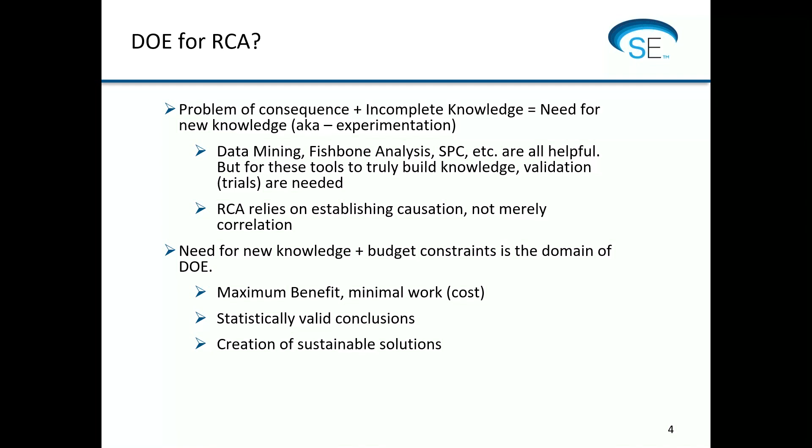Well, what's the cost of not understanding your product and its attributes and leading to quality issues, right? So a lot of times there's plenty of time to go fix it, but not always enough time to go do it right the first time, right? So anyway, I digress. So here's the situation. We have bubbles in the thermal interface.

So on the right-hand side, let's get a pen here. I'll just use a laser pointer. We have the computer chip referred to as the die. So that's the bottom layer. And what's happening is there is a lid being placed on top of the computer chip. And in between the two, there is a thermally conductive material called the TMI, the thermal management interface. And the goal of that is to help this whole assembly transmit heat through the lid, right? So we want a good thermally conductive material in the middle here.

So you can see we're talking about some form of computer chip. And what the customer was observing when they would, from the top now, take a look at an X-ray, if you will, of this whole assembly, is that on occasion they would have a bunch of bubbles in the thermal management interface layer. And they were able to kind of characterize it to say that when it's like on the left-hand side, that's a disaster for us, and that causes us to scrap the chips.

But on the right-hand side, which they measure as 2% voids or bubbles, that would be an acceptable tolerance. But when it looks like the one on the left, and you have bubbles throughout this thing, you're creating all kinds of problems. Specifically, this material contains a metallic flake that's used in a matrix, and the metallic flake is used to conduct the heat.

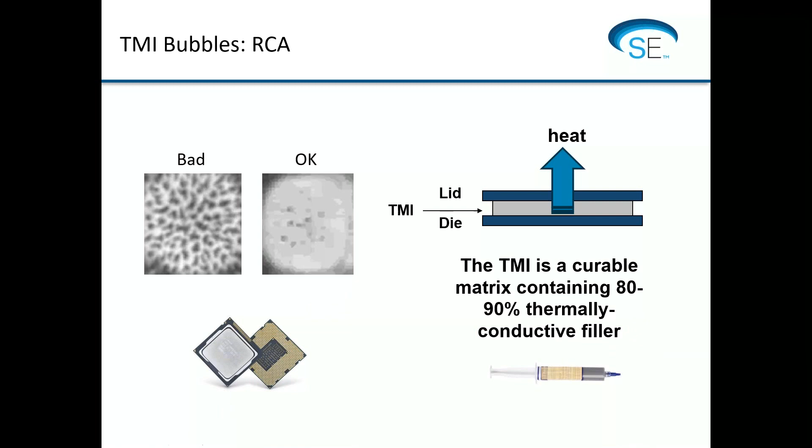So let's see. Okay, so the first point I want to make is it turns out that in spec material, as produced by my client, can perform good or bad at the customer. So here's the story, right? We saw this picture before on a previous slide, and if they pry the lid off and just take a picture of what the computer chip and the lid look like, you can see that it's just laced with these bubbles, these voids. Okay, so that's a true statement.

So the computer company tells us, look, here's a known good batch and a known bad batch, right? One that worked well for them and one that didn't. Can you evaluate and confirm whether or not they perform? Well, so we brainstormed with the team and came up with a way to approximate their application, and it was a very simple test. We took microscope slides and put the thermal management interface material between the microscope slides and cranked them down so it was the proper thickness.

And then we ran it through the heat cycle as prescribed by the computer manufacturer, exactly like they did it. Well, as it turns out, the known bad batch, we got a bunch of voids in it too. Looks just like their lid, right? So our microscope slide test was a pretty good indication of what was going on. And by the way, the known good batch was perfect. We didn't see a single bubble in it.

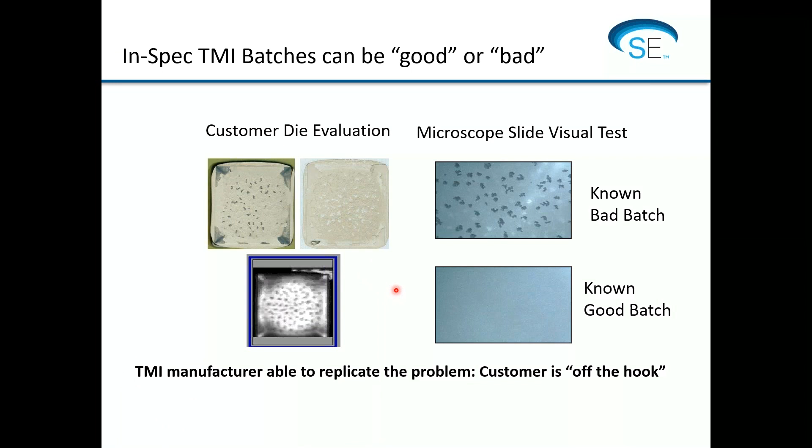So, like Steve talked about yesterday, we sat down with the team and did brainstorming. We involved the computer company with this as well. So we went all the way around the tables. This one's laid out a little different than Steve's yesterday, but we looked at the fundamental manufacturing steps. We looked at the raw materials: my client produced the matrix, the material that would cure under the heating cycle, and then there's an external metallic flake that goes into the product at 80 or 90%. And so we had that raw material.

The processing involves mixing and pre-packaging. The packaging itself, into the syringes, there's a de-airing process, and then they load the syringes. And then the customer uses the syringes in their application. The material is exposed in their environment for a period of time, and then it's heat cured once they put the lids on it, right? So they batch them up and then put them into an oven and go through this particular cycle.

So we looked at these steps and we imagined, well, what could go wrong in each of them? And the processing: loading, mixing, pre-packaging. Could we envision anything in there that might be a problem?

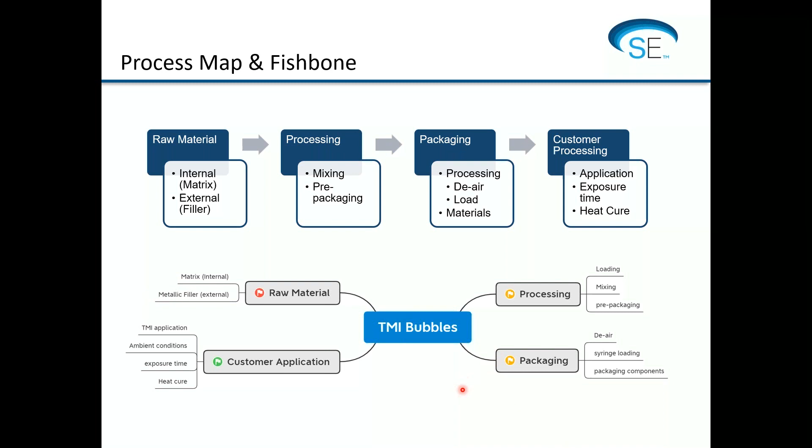Okay, that didn't build like I anticipated, but we'll get there. I'm going to put it all in here. I thought I got rid of the builds, but here we go.

So now we're starting to dig into the reports and understand the technology a little bit more, and we're trying to figure out what could cause these bubbles in the thermal management interface. Well, it turns out that if there's some moisture around, this is the theory now, the chemistry of the matrix material in the presence of a base catalyst would liberate hydrogen gas. That is a known phenomenon in the literature at my client's. Okay, so that could happen.

So then we take a look at several batches at the computer customer that succeeded or failed. And we measured the amount of water in the product. Well, it turns out that there is a very loose correlation between the water amount and the bubbles that were indicated by the computer company. So there's at least something of a correlation there. Not gonna claim causation yet, but there certainly is an indication that maybe this theory, pardon the pun, holds water.

Then we went out to the metal flake producer and had a conversation with them. Do you guys ever have any basic contaminants in your product? And they sort of laughed and said, we have base all around our shop. It's a common material, and we had no awareness it might be of concern to you. Oh, well, that's interesting. Do you think you could get rid of it if you needed to? Oh yeah, that would be easy.

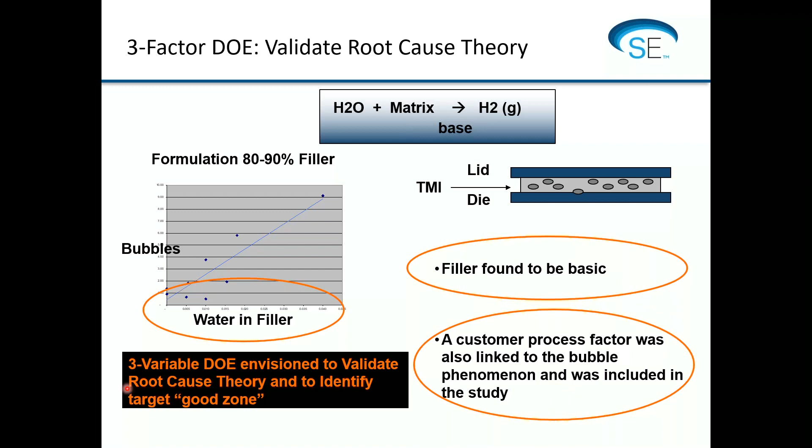So we went to the metal flake manufacturer and said, do you think you could set up to make these 4 corner materials for us? Do you think you could, within this range of water that we specified and the base catalyst level, execute your process to kind of target those 4?

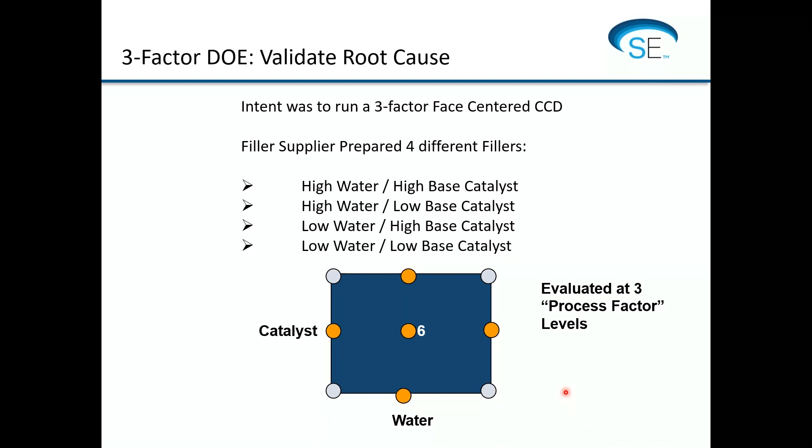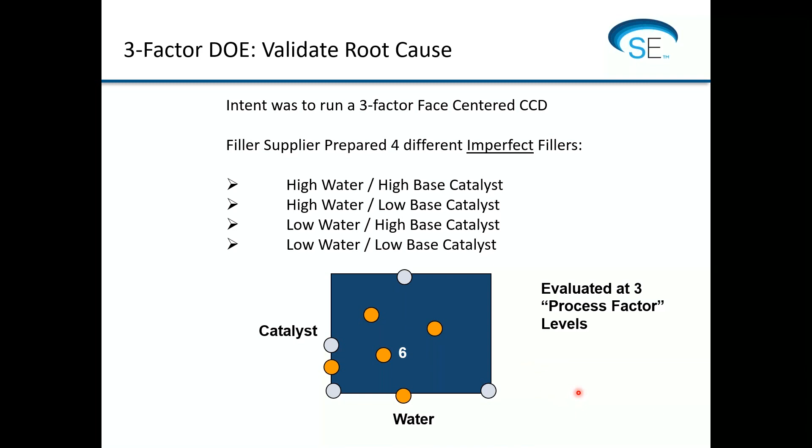So they made these 4, the silver ones now, they made those 4 materials. And then, just with the quantity provided, we were able to envision making the orange points. So, okay, now we got to figure out how to work that into a designed experiment.

So the first thing that we did, recall now that the computer company really didn't want to play too much. They didn't want to be terribly involved in this thing. They just wanted us to prove that we understood the phenomenon and could resolve it. So what we did is we went out and did a lab DOE as a preliminary effort to prove the concept. So we didn't involve the customer.

So we didn't include the process factor that the computer company wanted us to include because that was their process, not ours. So we really did a 2-factor central composite kind of, but we input the imperfect, right? The points that I just showed you weren't going to be an exact central composite design because the corners weren't where we want them. So we just used a central composite model and put the points in as we had them.

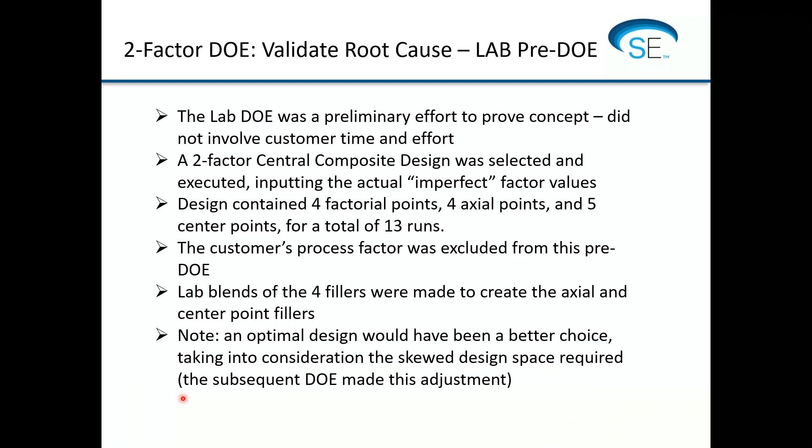We made the lab blends of the 4 fillers, created the axial and center points as best we could. It turns out that an optimal design would have been a better choice, taking into consideration the skewed design space. Nevertheless, we just kind of threw it in there and tried to see what the software would tell us. And there will be a second round of DOE that involves the customer, and we're going to be a little more careful designing that one.

So sometimes a picture is worth 1,000 words. We gather all kinds of statistics and make sense of the story. But this was already compelling that perhaps we were onto something, right? We look at the base catalyst, we look at the amount of water in the system, and it looks like you have a yes and, right? The more base, the worse, especially in the presence of water; if you have sufficient catalyst and the reactants are present, then you get the liberation of hydrogen gas as theorized. So that made short work of this.

And we are able to go out to the customer now and show them this chart that said, look, water and catalyst, your goal is to have less than 2%, right? And there's this big blue region where we're underneath that 2%, and there's a place where we can make really bad product, and we know that we can do it. The pictures, again, are worth 1,000 words.

Okay, so at this point, we've defined the problem, and we've measured performance, right? We understand that the problem is bubbles, and we set a specification of 2% voids as acceptable according to the computer customer. We've measured the performance. We know where we stand right now, and we're in the middle of the analyze phase in the DMAIC process for Six Sigma.

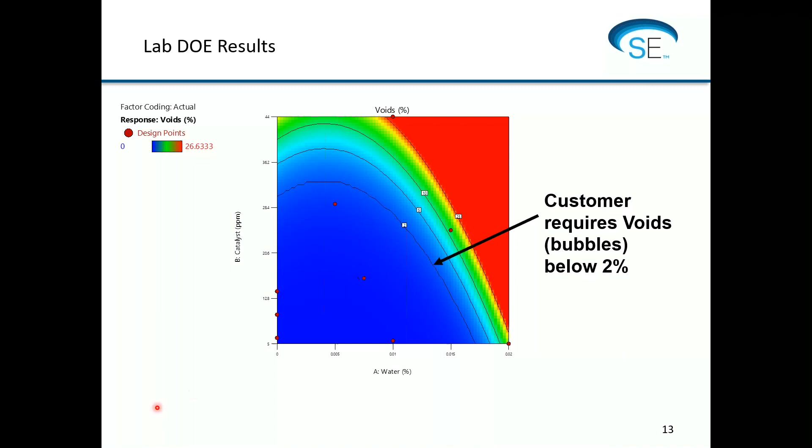The problem with that design that we created in the lab, of course, is that with the skewed distribution of points, the standard error plots really fade off when you get outside the region where we were collecting data, right? We don't want to extrapolate. So the standard error of the design looks really weak up in the corners, where you can see the red points are where we had data. When you get too far away from the bulk of your data, the ability to make predictions fades quickly. So that's something we're going to want to fix in the next round of studies.

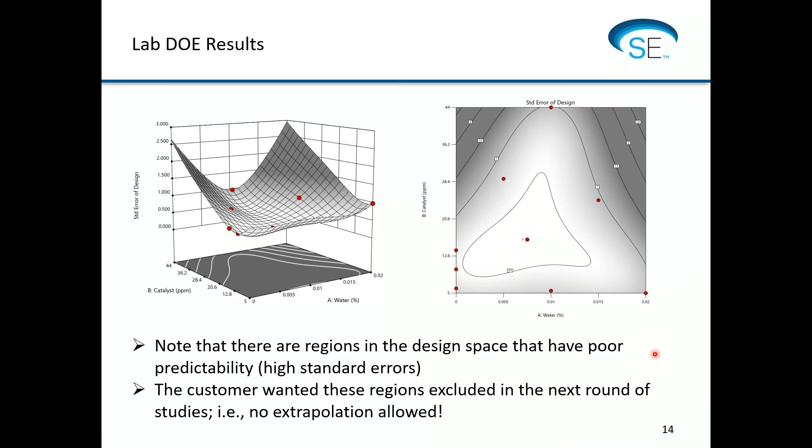So now we got back in the airplane and went off to the computer manufacturer. By the way, this was a lot of frequent flyer points on this one. The computer company wanted us there every 2 weeks for an update in person. Okay, so they want to make this as painful as possible. We get that. They're sharing the pain for us. So every 2 weeks we're out there.

So they're somewhere in the U.S. Let's just say that. The metallic flake producer is in Massachusetts, so we're up there. The manufacturer, my client's manufacturing operation that produced this product and put it in the syringes, was in Japan. So there was plenty of travel going on to pull this thing off.

So anyway, now we're back to the computer manufacturer, and we're able to show them now what the lab study revealed. Okay, and we invited them to participate in a second round of designed experiments, which they were less than thrilled about. If you recall, they didn't want to play at all. So we had to entice them. We had to show them. So first of all, by demonstrating what the earlier DOE was able to reveal, that drew them in, right?

They were not practitioners of design of experiments and were leery of the concept. We had to do a little bit of training to get them on board. But the DOE for the second round would be a full-scale replicate of the lab DOE, but would also add the customer's process factor that they wanted to study, performed on their shop floor. So they didn't want to be involved, but they wanted their factor included, but the only place that factor could be included would be on their shop floor.

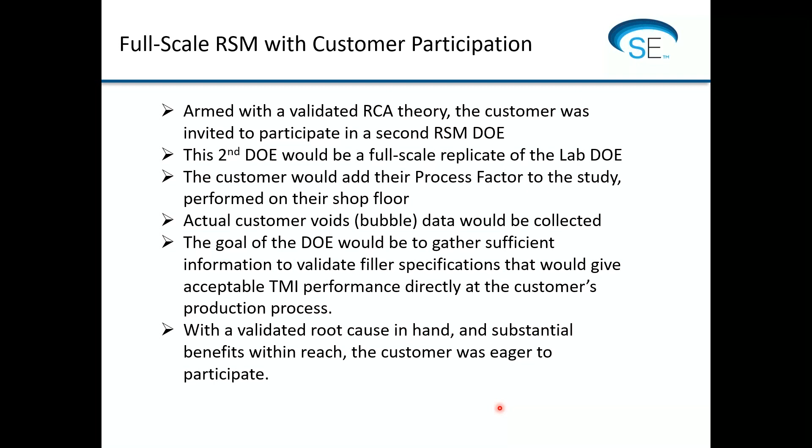So basically, from our lab work, we had a validated root cause, and the next step now is we want to gather sufficient information to set the specifications required with our metallic flake material, so that it would perform specifically in our customer's application, including their process factor.

So an optimal RSM was designed, and that's going to allow us to use the constraint tool to crop the design space. So in a moment, I'm actually going to open the software and build this with you and show you what we did. The DOE was essentially a 3-factor study, but really it was kind of laid out as a 2-factor study with each resulting run evaluated under 3 process factor settings, right?

So I really like what Mark had to say yesterday, kind of loosely interpreting a quote he had from Box, and that's that really what you want to do is block what you can and randomize what you can't. More specifically, Mark included the idea that split plots are kind of a more sophisticated way of blocking sometimes. So we want to include that thought. But if necessary, regardless, proceed in whatever run order you must rather than abandoning DOE. So that's kind of the zone that we're in.

We're going to have to do two factors, kind of lay out the study that way with the material that we have available to us, right? I can't just get any formulation I want. And then we're going to evaluate those under 3 process factor settings at the customer. I don't know why we settled on 6 center points, but I'm glad we did. It was a pretty robust way to prove that this thing would be repeatable.

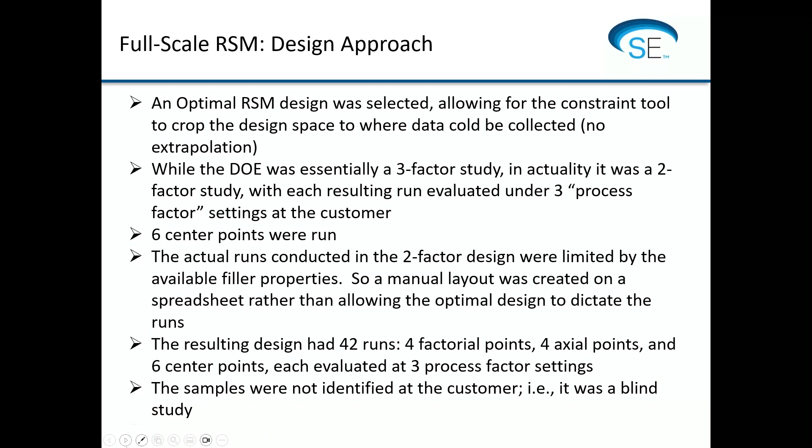Right, so we ended up doing a 42 run design, but that includes the 4 factorial points, 4 axial points, and 6 center points. Okay, so that's 14, and then each would be evaluated at 3 process settings. So there's really 14 specific canisters of material that were sent to the computer manufacturer. And it was done blind. The computer manufacturer didn't know what was what. We just sent them these 14 materials.

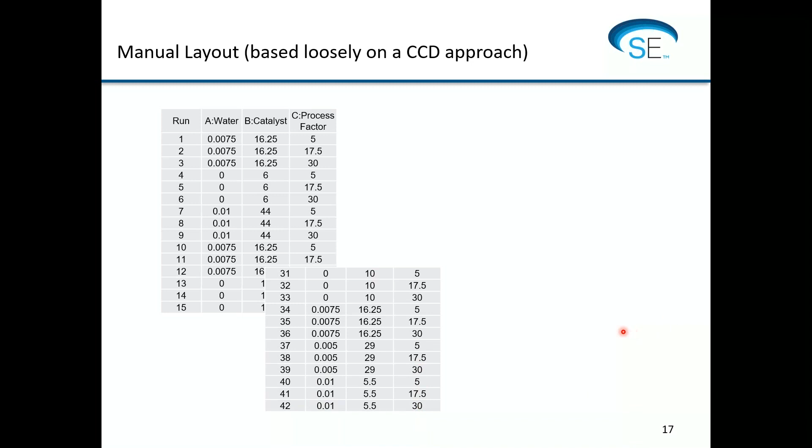So what we did is we laid this out, knowing the material we could produce from the metallic flake. We knew what material we could produce by blending what we had, and so the water and catalyst levels were dictated by what we had, and then we're going to evaluate each one with the 3 different process settings, right? So we have all these different runs up to 42. Okay, so that was how we're going to have to do this.

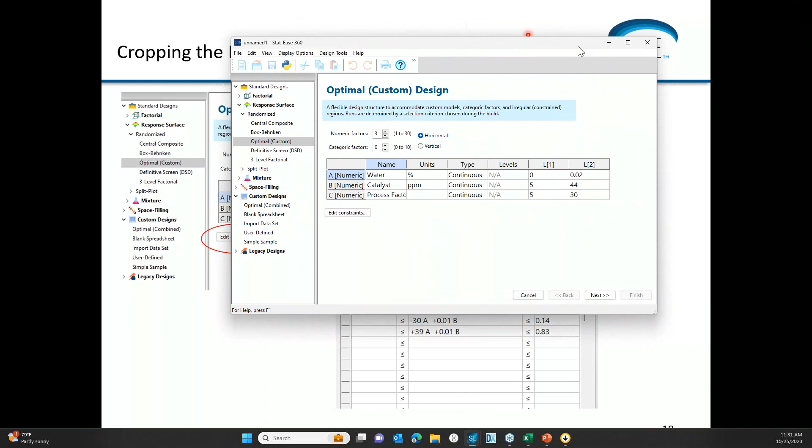And so let me go to the software and show how we accommodated this situation. Let me try to open this up, and hopefully you'll be able to see the software. No, let me get there again. Okay. Pardon the tech. Now I think we're getting there.

So what we're doing now is we're creating an optimal design. The reason we're doing optimal is because I want to crop the design space to get rid of those regions where the standard error was too high. Specifically, the computer manufacturer insisted that we wouldn't do any extrapolation into those regions. I can't do that in the central composite design. So I'm going to use this edit constraint feature in the optimal, so I can create an odd-shaped design space.

We're going to use the edit constraint tool, and we're going to cut off the corners so it matches what we need. The first vertex that I need to play with is this first one, and the constraint point here is going to be 0.01. You'll see later how this works. The second one is 5, and then factor C, the process factor, I don't need to do anything with, so we can skip that. And that builds the constraint to cut off one of the 2 corners, and then we'll do another one.

This one now, the vertex of interest will be 0 and 44, and now A has to be greater than 0.01, and that's 14 here. So a little algebra and a little math to sort out what those values need to be. But in the end, we've created these constraints. Now I knew that I was going to do 42 runs, so here's what I did.

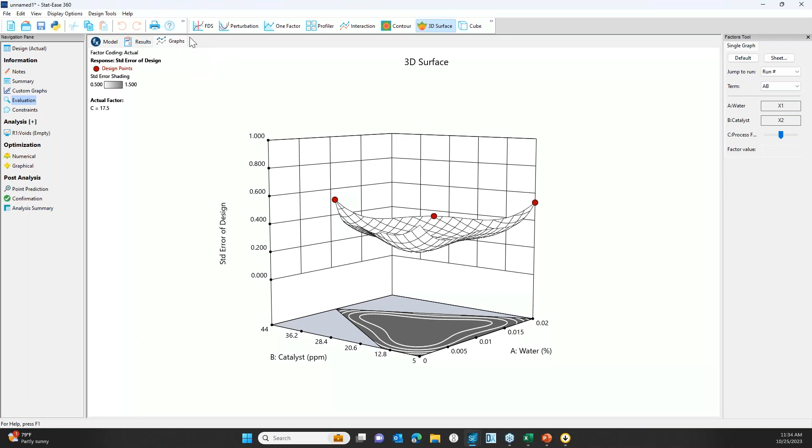These isobars tell me a little bit about the standard error plot, so it doesn't look too bad. I always like to look at the 3D surface of that. And you can see that it's, I'll say, low and flat. Well, this all is translated into the fraction of design space. I don't have relevant specific information to put in here, but I'm going to evaluate this at what is probably a pretty robust 1-to-1 ratio, just as a benchmark. And if I do that, I see that the fraction of design space where I can make suitable predictions is 99%. So that's stellar. That's regarded as really, really solid.

Now, however, I'm going to put in the design points, not the optimal ones, but the ones I'm forced to run, right? Mark's quote from yesterday: in the end, run what you can, run what you must. So let's take a look at that. I'm just going to do a quick copy paste here from a spreadsheet. So now I'm going to replace all that with what we can do. Okay, so there it is. There's the runs that we're forced to run. Now let's evaluate it.

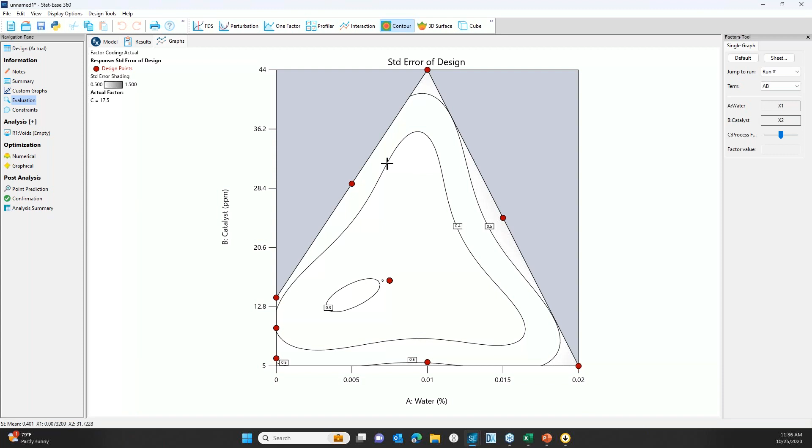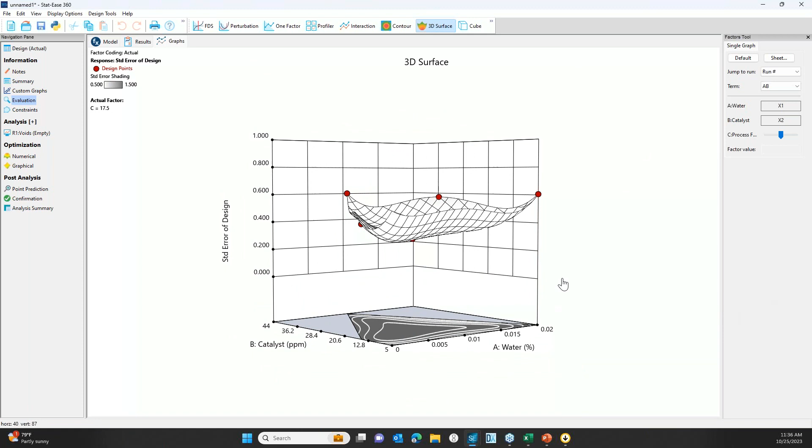Not as flat. Okay, so that's going to be interesting. The contour plot, however, I still see the data points where I want to run. These isobars are kind of what they are. If I look at the 3D surface on that, the optimal was better, but this isn't terrible. I think we're gonna say that this looks pretty good, but let's validate it with the same benchmark

in the FDS graph. And here we see that we're up to 86 as compared to 99. So yeah, the optimal design beat my manual design, that's for sure. But this is greater than 80, our rule of thumb. So we're gonna go ahead and do this one.

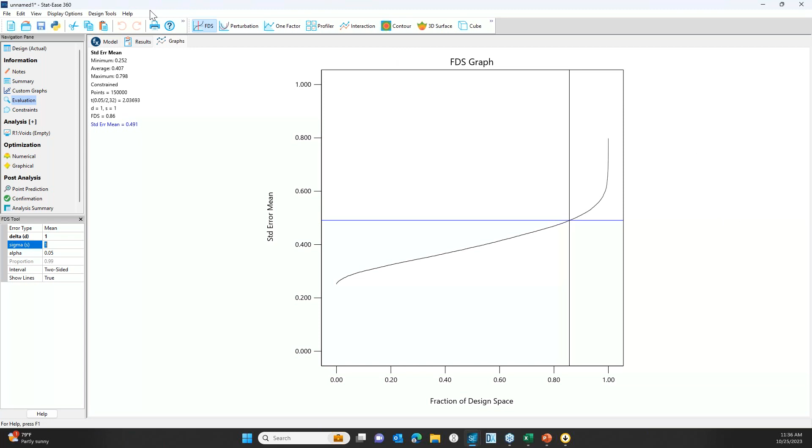So we went out there, collected the data, and because Thaddeus taught me how, I will load an existing simulation. And there's the data. Okay. Now we're going to analyze it as usual. And we'll start the analysis. And what I didn't tell you before is it looked as though a log transformation from the lab run was going to be helpful. So here we're looking at this, it's suggesting a quadratic.

It's indicating that cubic might bring us a little extra value. But let's quickly run through this. The ANOVA analysis here, perhaps I could do a little model reduction, but the ANOVA analysis is telling me that I do have significant lack of fit. And if I look at the diagnostics, just like the lab study, the Box-Cox down here is recommending that I do a data transformation, specifically a log.

All right, so we're going to redo this analysis. I'll keep them both so we can compare if we need to. I'm going to call this one with the log. And here I'm going to use natural log because that seems to be a more logical fit with the phenomenon that we're seeing. Turns out, without making too much noise about it, this K was going to be required to stop us from taking a log of 0 and blowing up the thing. So anyway, we'll start the analysis.

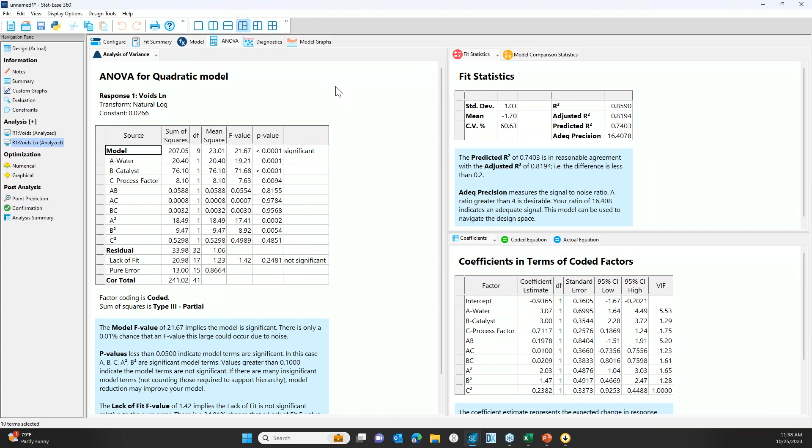And now it looks like a quadratic is going to fit pretty well. I don't get a lot of additional benefit by even going up to cubic, so that's a good thing. We look at the model. We can take a look at the ANOVA here. I do have some terms that maybe can come out like C squared. I'm looking at the predicted R squared of 0.74. So I'm going to try model reduction. I'll use the automated approach to pull some terms out. I use p-value backwards in this case. I get the same result no matter which one I use.

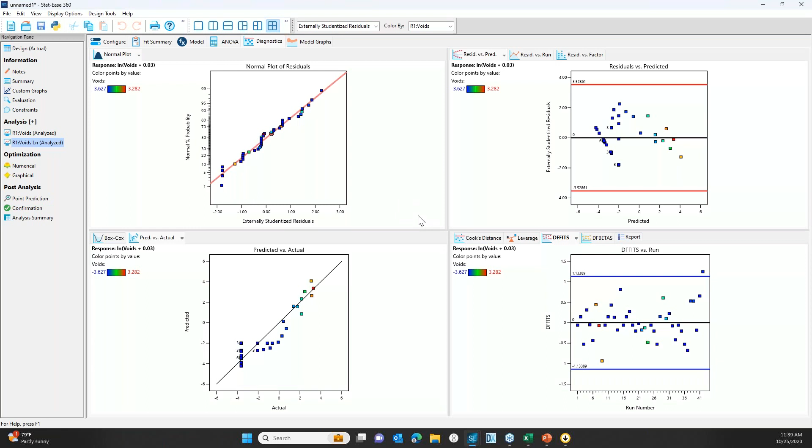The C squared drops out, but I do have A squared and B squared. So the process factor is contributing, but it's only a linear effect, whereas I have some quadratic behavior for the two factors that we're looking at. I improve the fit statistics by doing model reduction. Significant model, not a significant lack of fit. Make a long story short, the diagnostics now look pretty solid. And we can go to the model graphs. We can look at the contour.

Maybe I'll add the contour now, let's set contour value to 2% where the customer needs it to be. And we can see now that we have a region where we're going to be successful. And I can change the process value. So the process factor definitely is having an impact.

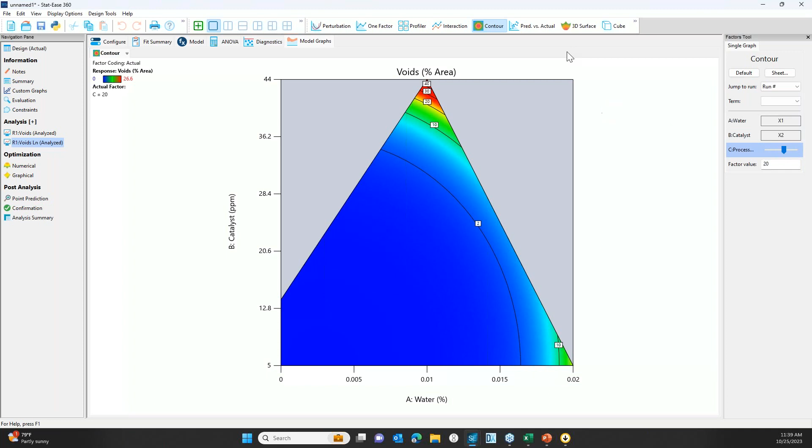I like to look at this perturbation plot sometimes. And I'm going to change this to the transform scale because it seems to make a little bit more sense if I do that. So this is the log of the bubbles, if you will. And now I can see what happens as I change the process factor, that it exacerbates the phenomenon for sure, okay?

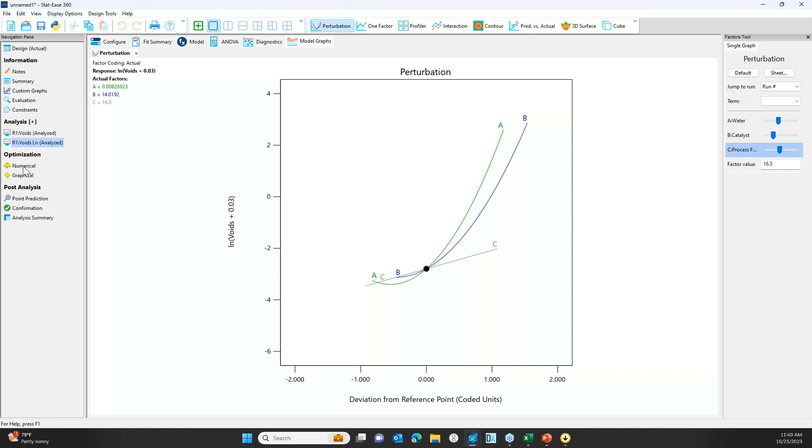So as I drag the process factor from its low setting to its high setting, those two other curves just simply rise up, right? So it makes a bad situation worse. So it's a contributor, but it's a linear contributor. All right, so next we want to find out, how about specifications? Now that we sort of validated this whole story, what are we going to do for specifications? Well, we're going to go into numeric optimization. I'll click on voids.

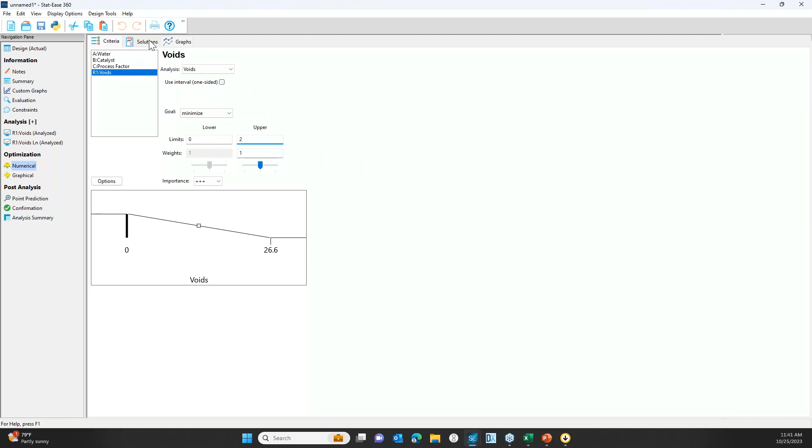What do we want to do with those? Well, we want to minimize them. The upper range here is going to be 2. And we can look at solutions, and sure, there's going to be solutions, but I think the more interesting thing is going to be the graphical optimization.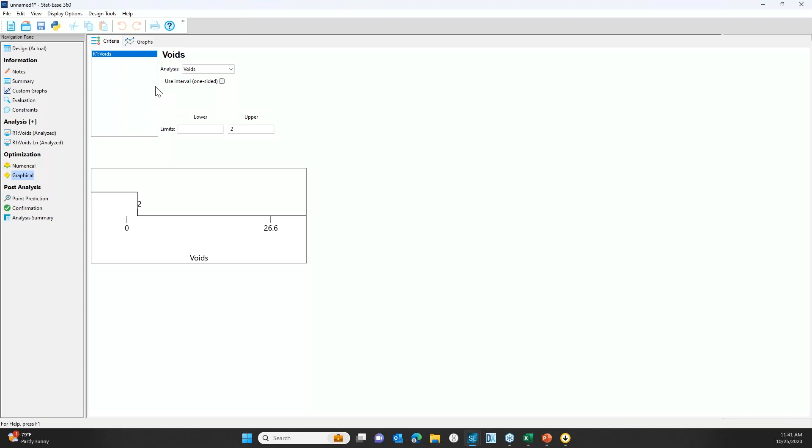Well, back in the criteria, we are going to turn on the tolerance interval. And this is going to look at where, with 95% confidence, 99% of the individual batches should reside.

And this is not behaving as anticipated. So let me just simply say that I fat fingered something in this demo. So what I'm going to do is quickly open up the real one.

You know, it works in practice every single time. But if it's ever going to fail, it's going to fail in public. That's just the way these things tend to go. So quickly here.

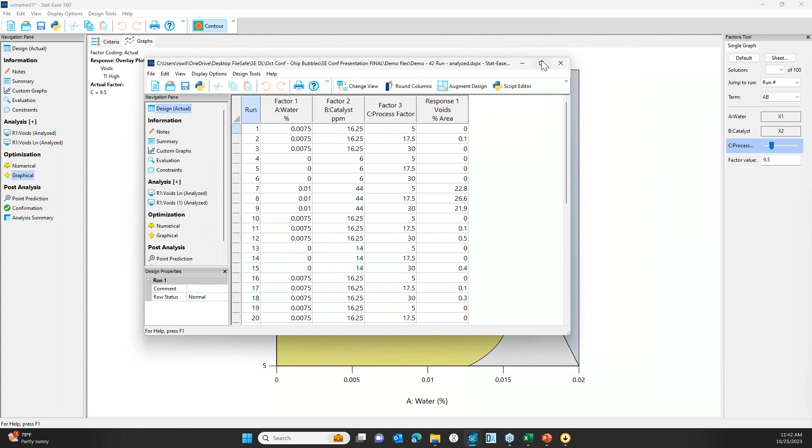So this now should be the one that works just fine. So in a better world, you would have seen a slide that looks just like this one.

Okay, so I don't know what I did in the last one. Never fails if you're in public.

Okay, so now we can play with the process factor. And what we can see is 99% of the batches with 95% confidence should reside within this bright yellow section of the graph. And now we can sort of pick the process factor and balance all of the considerations, also knowing what the metallic flake producer believes they can achieve.

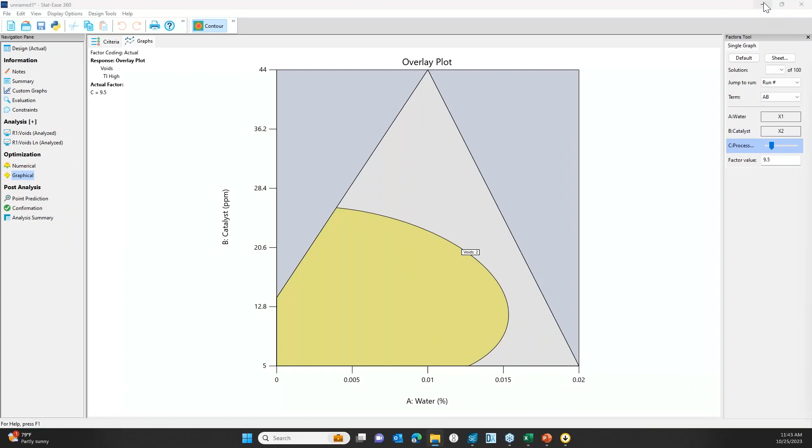So putting all of these factors together, coming back into this presentation now, we were able to set the specifications at 14 parts per million catalyst and a 0.01% water level, with the process factor more or less at the mid-range, which was completely acceptable to the computer manufacturer.

Okay, so now we are successfully producing material with confidence using the tolerance interval to set specifications. And we have not only validated root cause, but we've figured out how to improve the performance. We've worked with the metallic flake producer so they can control their process. We reset the specifications, and so we have a control strategy in place now to execute the discoveries that we gleaned from the DOE.

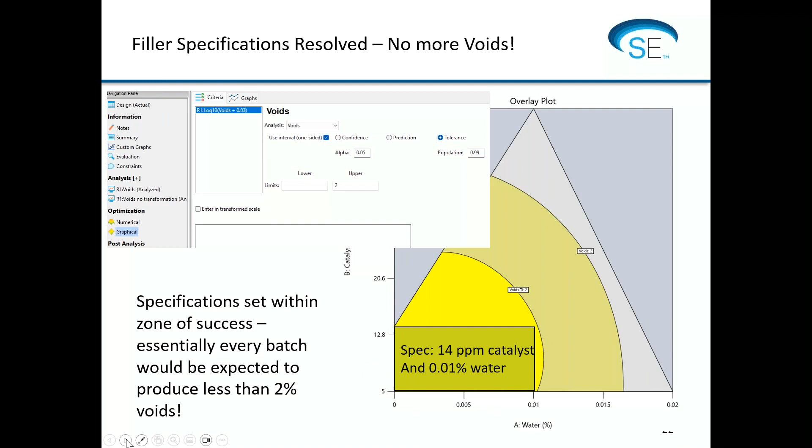So the takeaway messages are this. Number one, the quality is what the customer says it is. We either build quality into the product, or we kind of don't, right? So in this particular case, we ended up with a problem-solving exercise that distracted all of the product development people because they now had to give up their day jobs to come over and work on a problem resolution.

We used the DMAIC Six Sigma process to solve the problem. There is another Six Sigma process called Design for Six Sigma, what I refer to as the DMADV process, where we go through up front and figure out what's required to be successful. We would have done this DOE at the onset if we had gone with that process, creating the material.

But oftentimes we think we can go quickly to develop and launch a product, and then when it blows up in the field, we have problems to solve. But we get to pick which way we're going to go. At the end of the day, the customer is the one who will decide whether the product works or doesn't work. And we can decide where we want to fit into that equation.

DOEs are so important; incomplete specifications at product inception can lead to significant problems down the road. We didn't understand what was really important with the metallic filler. And even in our own internal reporting at my client, there was mention of the potential for this material to have base catalyst in it, but we didn't understand the full importance of that and how consequential that could be.